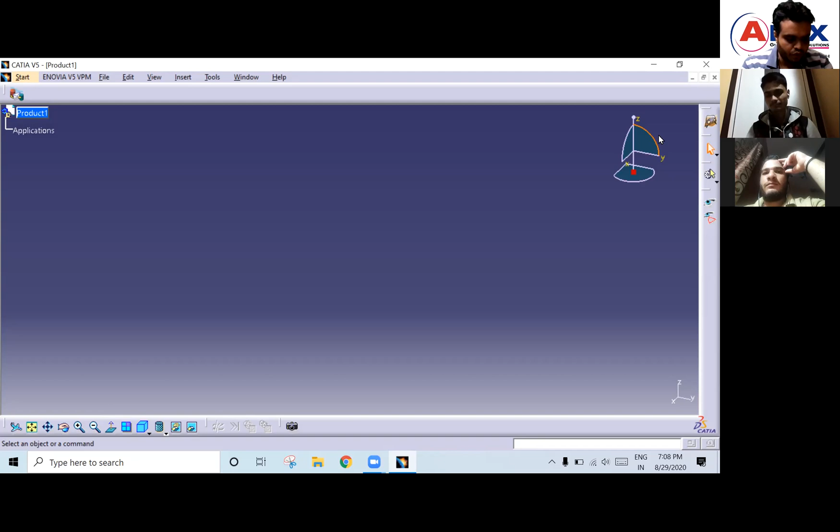So wait. Fine. Okay. So

To create sketcher part design, you need to go to Start, Mechanical Design. Here we have Part Design. Part design is used to create solid parts.

So here, to create a sketch, no need to go to a separate Sketcher workbench. You can directly create a sketch in Part Design itself. You can give any name.

See. Okay. Here you have. Fine.

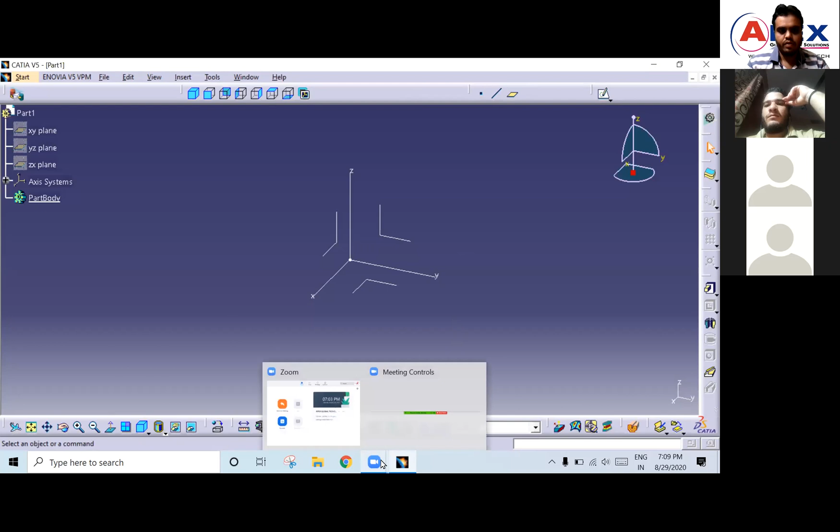So this is the sketcher. Here we have the options: sketch based features, dress up features, and surface based features, and transformation. By using these options, we'll create the solid models.

So I have given you the projects, right? So all of you have got the drawing.

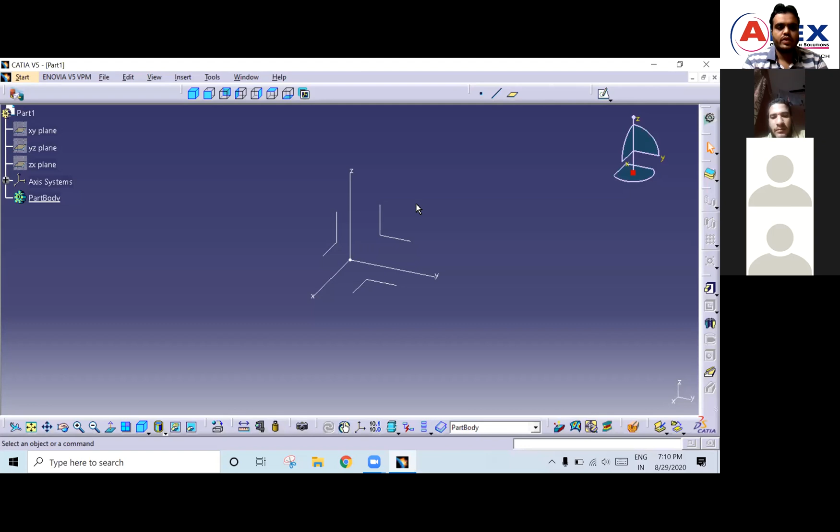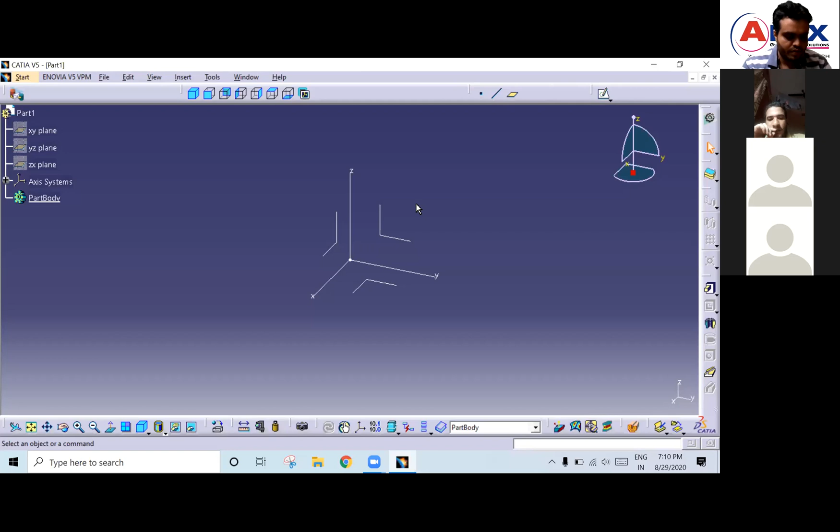Vinod, which project did you get? Vinod Kumar - Flywheel. Did you get the report? Did you get the drawing? What about the literature papers, have you downloaded them? Okay, so all of you have done the literature review, I told you to do that. No problem, you can submit it by tomorrow - those who are done, submit it now, those who are not done, submit it by tomorrow.

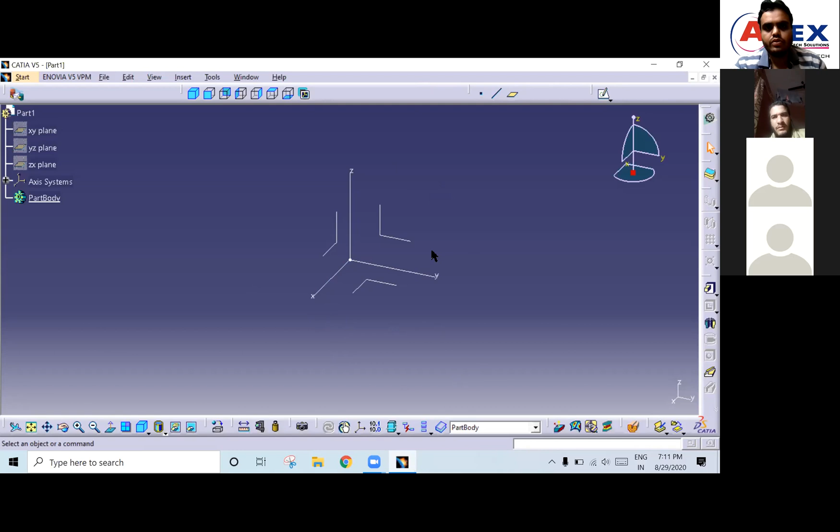So we'll start the part design. See, we need to look here, we have many features - sketch based features. Sketch based features means based on the sketch you are going to create features. So a feature is nothing but creating a part. We'll see how to do that.

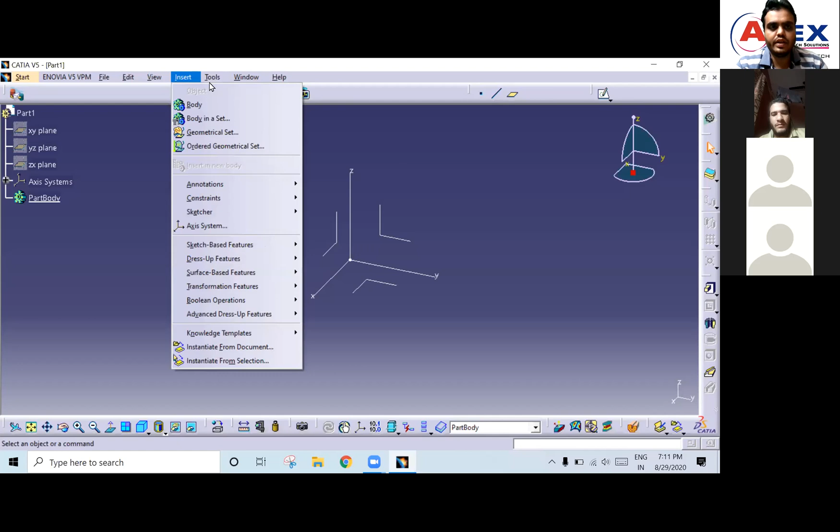So first in this option we have a very important one called Pad. One moment, wait for a while, I'll come back.

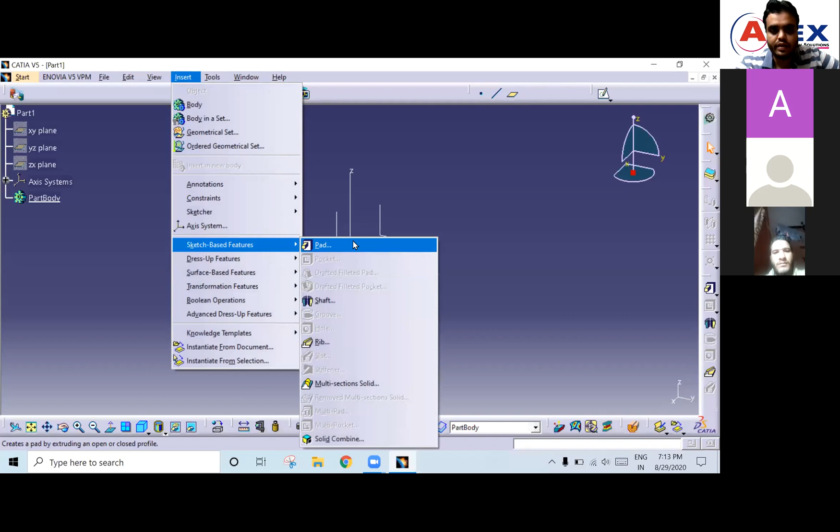Sorry guys for the interruption. Okay, so here, to create sketches, to create a part, we have Pad. Pad is a material adding feature. Here we'll get a shortcut.

You just take it, so here you have the shortcuts of sketch based features. See here, if you hold shift and drag it, it will turn vertical. If you hold shift again, it will become horizontal. See there?

Okay, so we'll see one by one. First we have the material adding feature, that is Pad. So Pad is a material adding feature.

So if you won't find this sketch based feature on your screen, right click here and you will get sketch based features. If you go down, you have sketch based features.

Okay, fine. So to create that, first you need to create a closed profile. Whatever feature or model you are going to create, that should be constrained. Keep in mind that whatever sketches you create to make a 3D model should be constrained, then only your design will be correct. Otherwise your design will be incorrect. You have to focus on that.

Got it? Fine. So here, what I will do - I need to select, after creating a sketch only you can create a 3D model. So how to create a sketch? Here we have the sketch option.